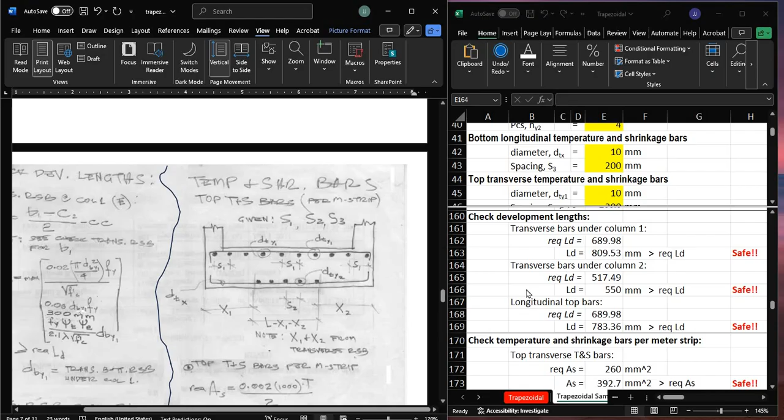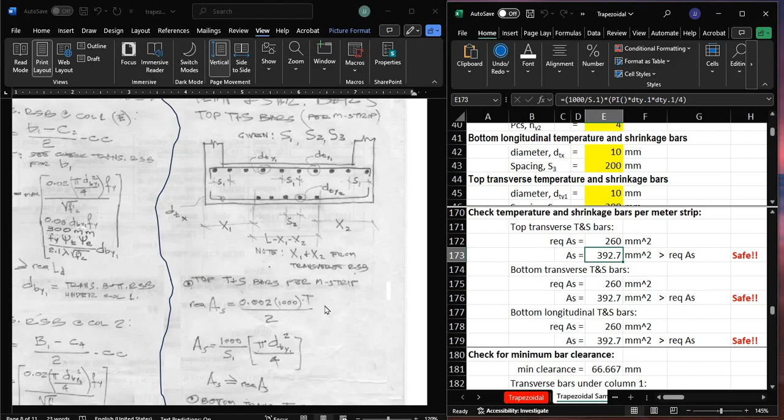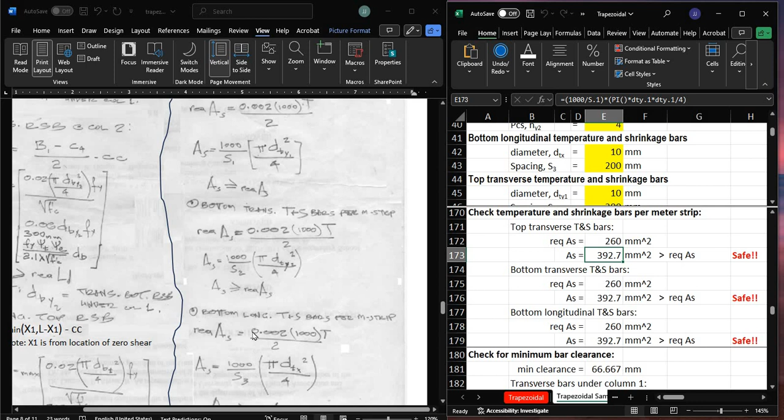So nag-start tayo sa top. Ngayon, kinompute niya yung required AS. Ito. Tapos yung actual AS. Yan. Followed by bottom transverse T&S bars per meter strip. So required AS and then yung AS. And finally, the bottom longitudinal temperature and shrinkage bars per meter strip, which is ayan.

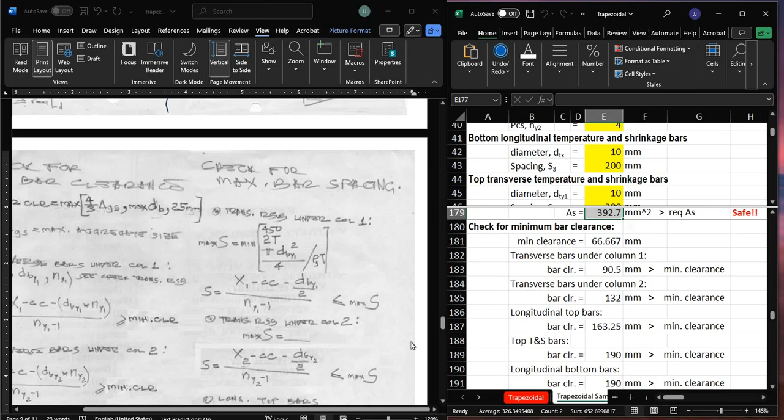And then, ang next natin would be yung check for minimum bar clearance. For all bars, gaya nito ang transverse bars under column 1, column 2, longitudinal, temperature, and shrinkage bars, we will be comparing this dito lang sa minimum bar clearance, which is the maximum among 3 conditions. So meron tayong 4/3 of maximum aggregate size, maximum bar diameter, and 25 mm. So kunin mo yung maximum dyan sa tatlong yan.

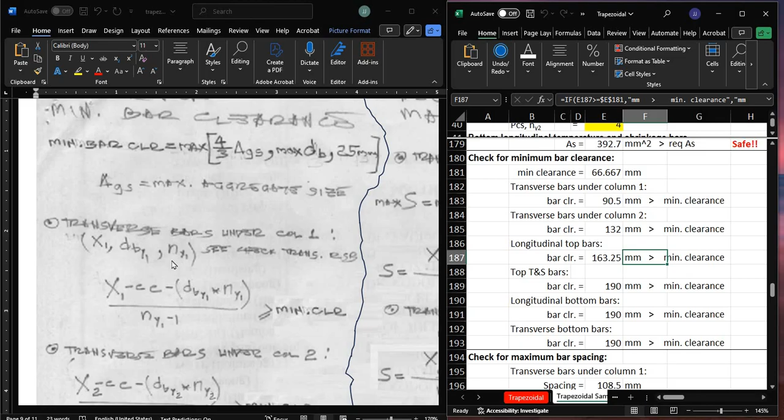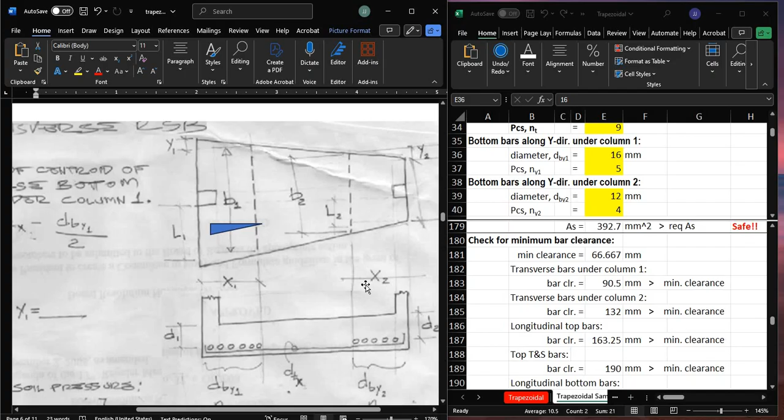So first, let's compute the minimum bar clearance para sa transverse bars under column 1, which is, ang kailangan natin dito ay yung X1, dBy1, tsaka NY1. Okay? dBy1, tsaka NY1. And yung X1. Nasaan itong si X1? Nanggaling yan dito sa check transverse reinforcing steel bars. Ayan, si X1. Ganon din si X2.

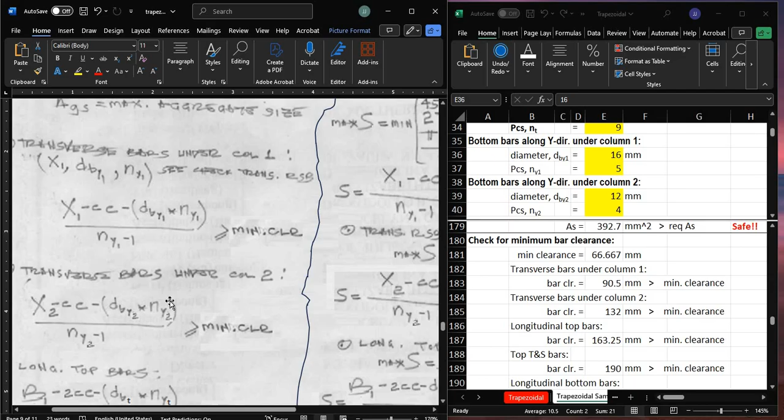Ang spacing niya is X1 minus clear cover minus dBy1 times NY1 divided by NY1 minus 1. This should be greater than or equal to the minimum clearance, which we solve here. For transverse bars under column 2, ang concerned naman dito ay X2, dBy2, tsaka NY2, or this one.

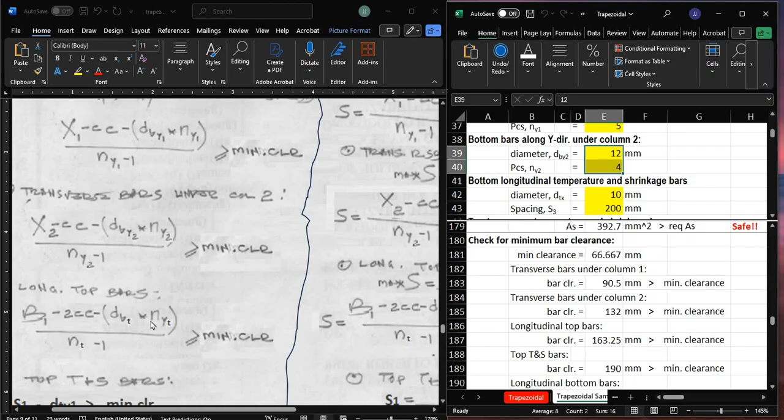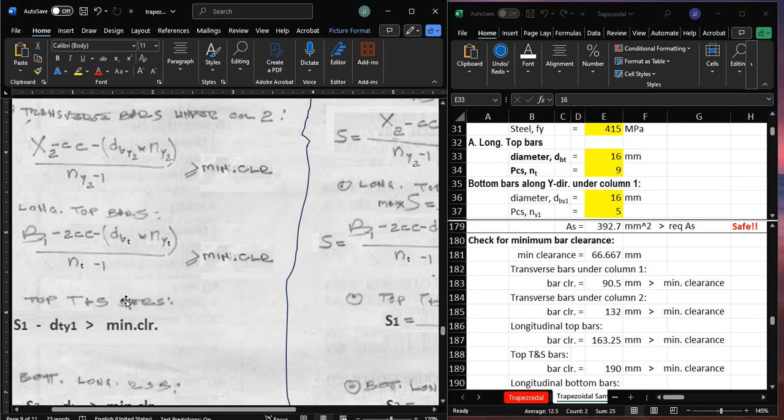And then for longitudinal top bars, ang kailangan natin dito ay ito. Yan. Tapos, sa top temperature and shrinkage bars, ang kailangan natin dito ay S1, which is this. Simple lang ito. So, yung in-input natin na S1 should be greater than dito sa kinompute natin.

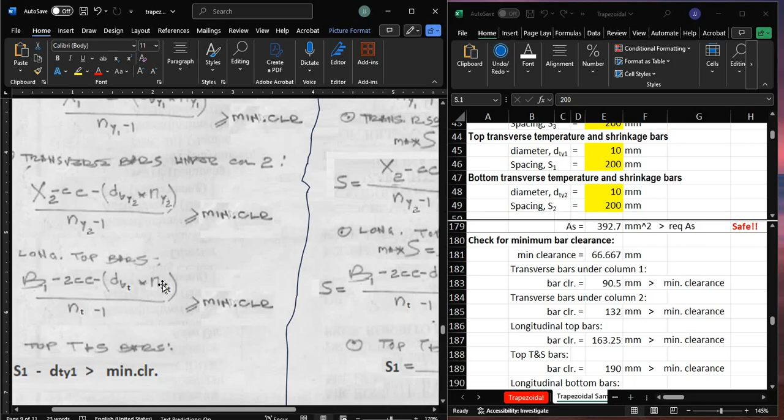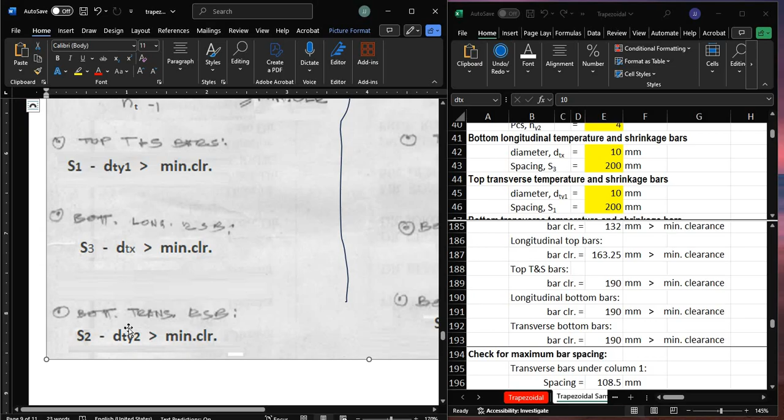And then, para sa S3 or bottom longitudinal reinforcing steel bars, ang kailangan natin dito ay yung S3. Okay? So, take note na i-minus natin dito yung diameter ng bar, dtx, dahil ang kinocompute natin dito is yung clear space. Ganon din dito sa S1 minus dty1. And then, for bottom transverse RSB, this is S2 minus dty2, which is, yan yung kailangan natin. So, ito yun sa kanyang Excel.

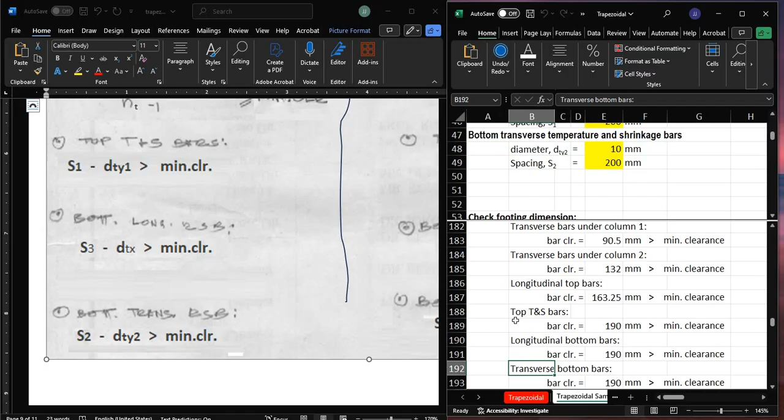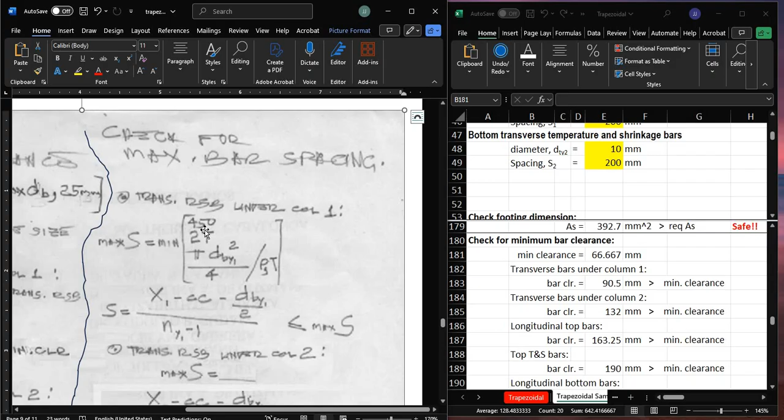After which, kailangan din nating i-check yung maximum bar spacing. Dapat hindi tayo lalampas. Otherwise, masyadong maluluwang na. Meron din tayong sinusundan na limitation. So kung merong maximum rho tsaka minimum rho, meron ding maximum spacing tsaka minimum spacing.

For transverse RSB under column 1, the actual spacing is x1 minus clear cover minus dby1, all over 2, divided by ny minus 1. So this should be lesser than or equal to the maximum S. Ang maximum S mo for transverse RSB under column 1 is the minimum among three conditions: 450, twice of thickness, and pi dby1 squared all over 4 divided by rho g times t. Take note na ang kasama dito ay yung dby1.

And then let's go to transverse RSB under column 2. Ang maximum S dito, same equation as this, pero ang i-consider mo dito ay dby2 to get your new maximum S. And then you compute your actual spacing, which is x2 minus cc minus dby2 all over 2 divided by ny2 minus 1.

And then for longitudinal top bars, ito, ang concerned naman dito ngayon ay db top. Okay? Tapos, syempre, computein mo rin yung kanyang sariling maximum spacing. Ang gagamitin mo dyan ay db top. Yan. So, yan yung sasubstitute mo dito.

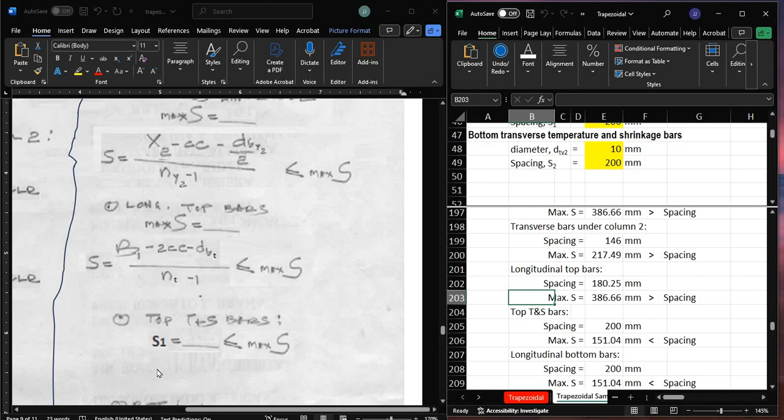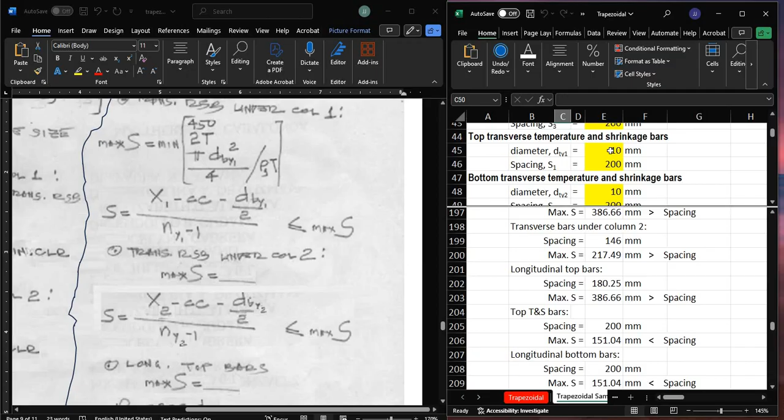And then, for top temperature and shrinkage bars, ang spacing dito ay yung input na S1, which is this. It should be lesser than or equal to your maximum S. Ngayon, ang kailangan mo na spacing dito ay yung dty1. Yan ang sasubstitute mo dito.

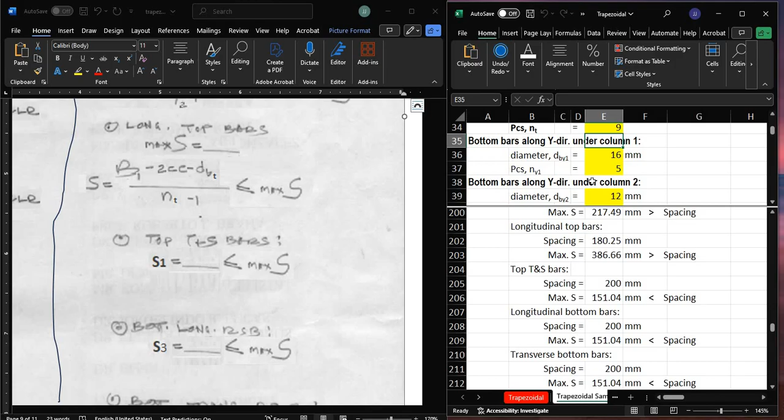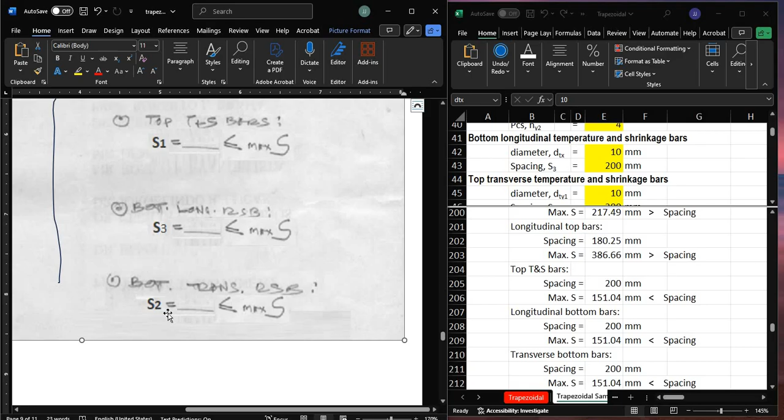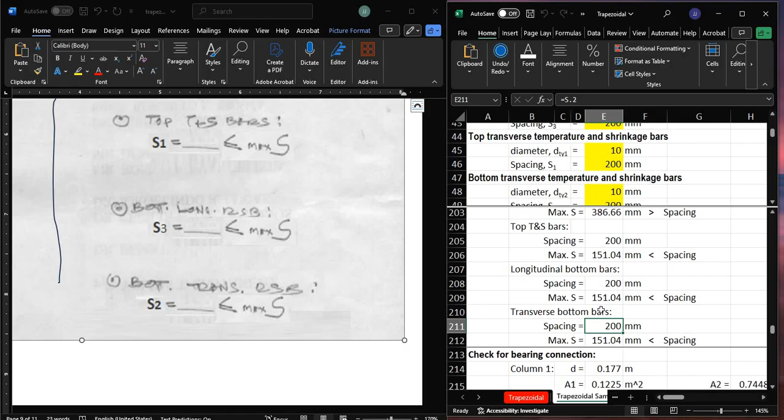And then for bottom longitudinal RSB, or that is for S3, ayan, ang kukumputin mo dito ay yung maximum S ulit, pero ang gagamitin mo would be this, yung dtx. Okay? And then finally dito sa bottom transverse RSB, which is ang involved dito yung S2, ito, no, transverse bottom, ang kailangan mong bakal dito ay yan, itong may S2.

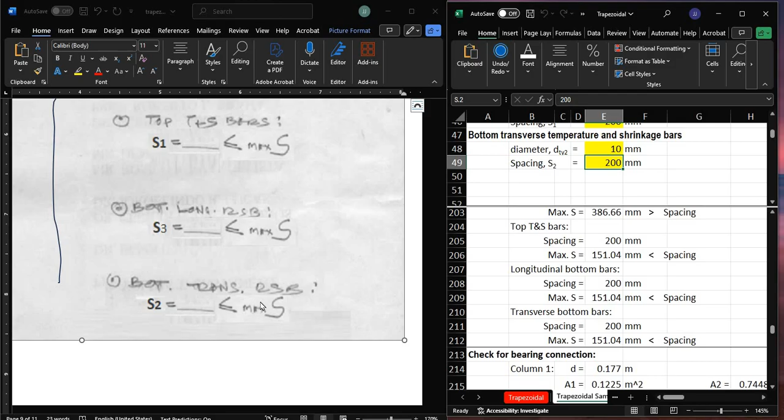So you have to compute also your maximum S here. Ang sasubstitute mo dyan ay yung S sub 2 dito. Okay? So that's how you check your spacing, minimum bar clearance, tsaka maximum bar spacing.